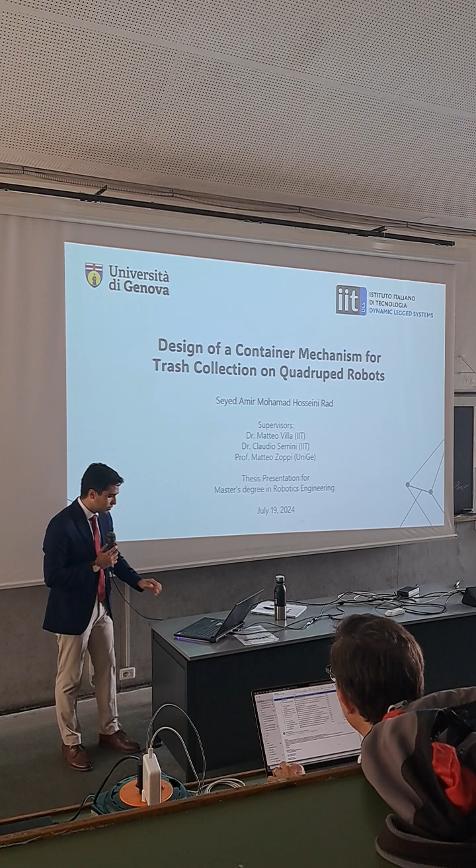Today I'm pleased to present my master's thesis on design of container mechanism for trash collection on quadruped robots. I will start with a short introduction to show the importance of the work. Then I will discuss the current robotic solutions and their limitations. I will discuss some background, and then I will start my project by defining the conceptual designs, down selection, simulations, mechanical design, manufacturing, and assembly. I will discuss the features, and at the end I will show the test and validation and conclusion.

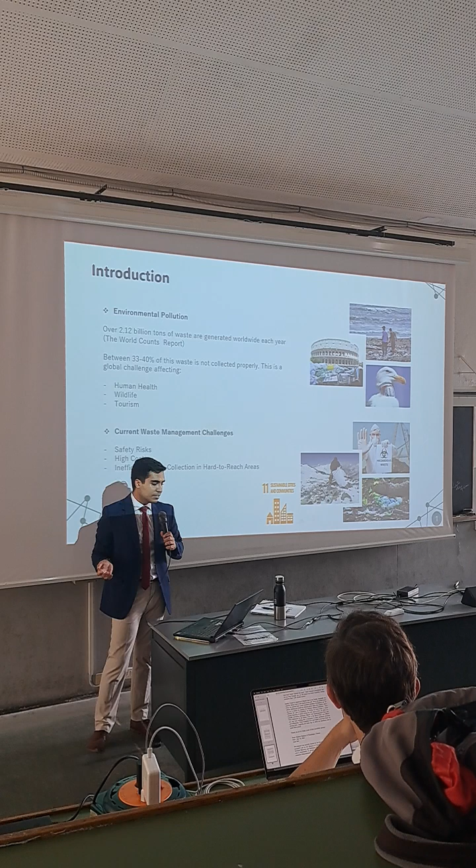An alarming amount of 2 billion tons of waste is produced every year by humans, and a huge amount of it is not collected well. This global challenge affects human health by spreading disease because of animals, and it also makes tourist places less attractive. Currently, this trash is collected manually, which brings safety risks for the laborers, it is very expensive, and the trash in hard-to-reach areas is not collected well.

Currently, there are some robotic systems to help us with this task. For instance, the first one uses a wheeled platform with a special mechanism mounted on it to collect the trash and store it. It's a very good idea to integrate the robotic arm with the mobile platform, as you can see in the second and third ones. In the second one, the arm is mounted in front and the container in the back of the mobile robot. A similar approach is deployed for the third one, developed by IIT in 2020.

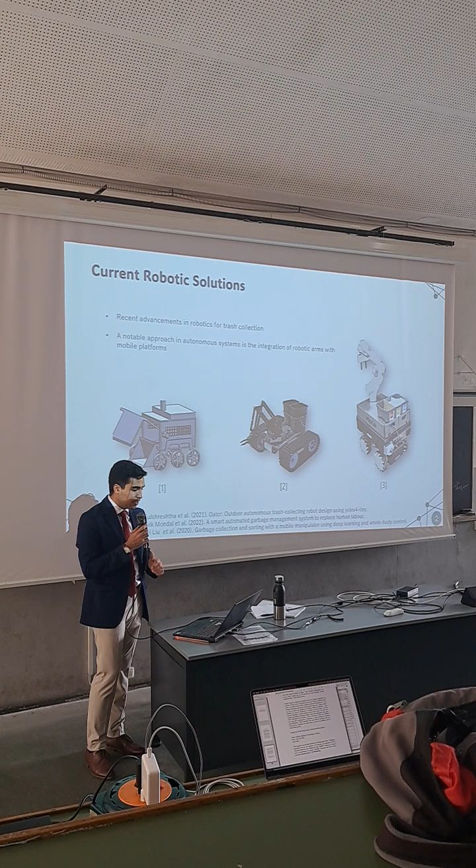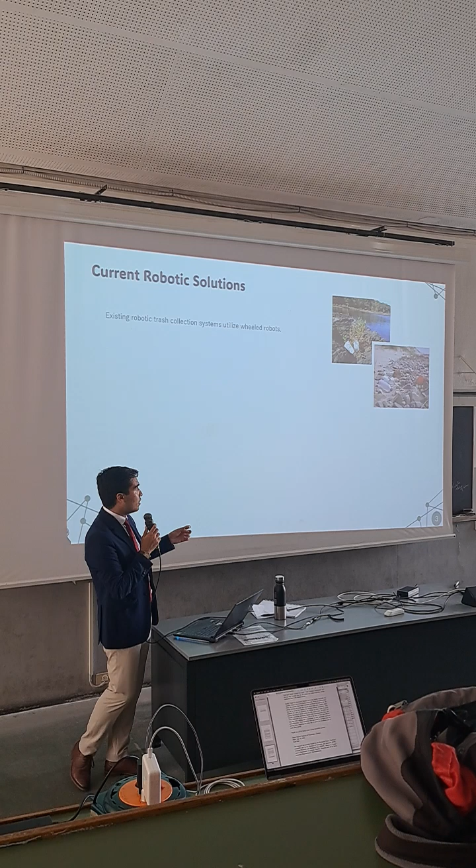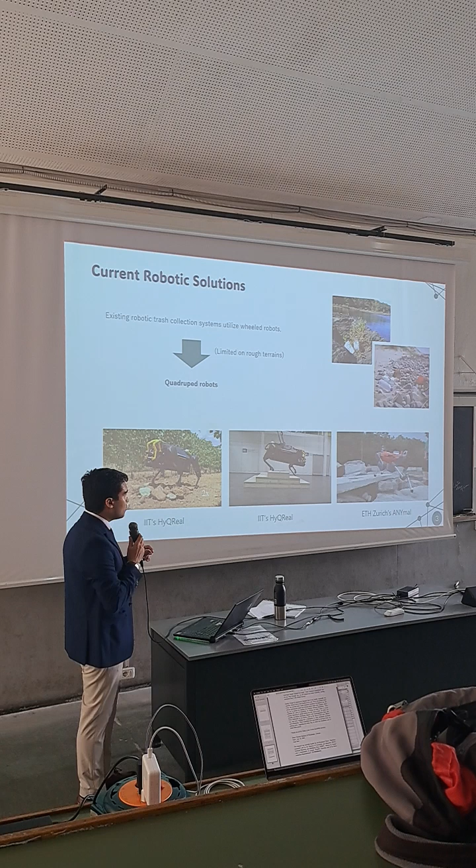But why are the current existing robots not sufficient? Why do we still need new robotic systems? The current solutions use wheeled robots that will get stuck in hard-to-reach areas or on rough terrains. That's why we are introducing a great solution, which is legged robots, with higher locomotion capability. For instance, in the first and second videos, this is the HyQReal robot developed by the Dynamic Legged Systems lab at IIT, and the third one, ETH's ANYmal, where it is clear how effective they can be for trash collection.

But imagine we have the legged robot. How can this robot collect the trash? We still need a robotic mechanism in order to do all the steps, from detection, collection, storage, and unloading, automatically without the help of humans. Here too, it is a good idea to integrate the robotic arm with the legged robot this time. And as you can see, there is a clear need for a robotic mechanism that can be mounted on the robot, the container, in order to perform all the steps automatically.

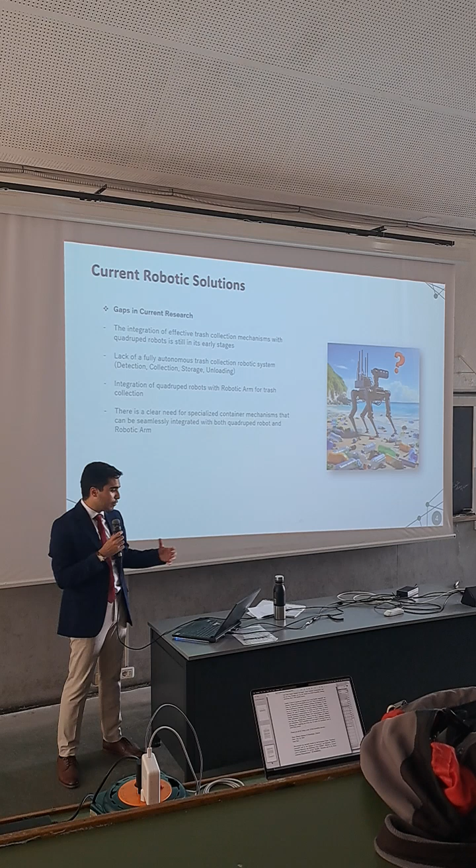Therefore, we define the background of the project by defining 3 main subsystems. The first one is the Unitree legged robot. The second one is the Unitree Z1 robotic arm. And the third one, which we discuss in this thesis, is the custom designed container mechanism. The cycle is planned so that the legged robot works in the environment and detects the trash with the mounted camera, then the arm grasps it and drops it in the container, and when the container is full, the robot navigates to the station to unload the...

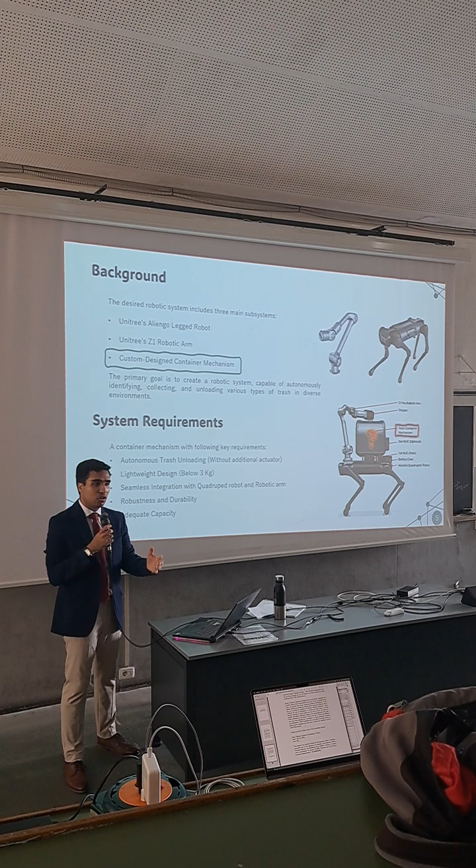Sorry. I think you are mute on Teams. Can you please check? Because Dr. Semini is telling me that... Can you stop the time? Sorry. It's okay. Now it's fine. It's fine now. Can you show me Teams? Okay. He says okay. It's fine. Okay, thanks. He's happy now. So it works.

We'll just move it, it's better, yes.

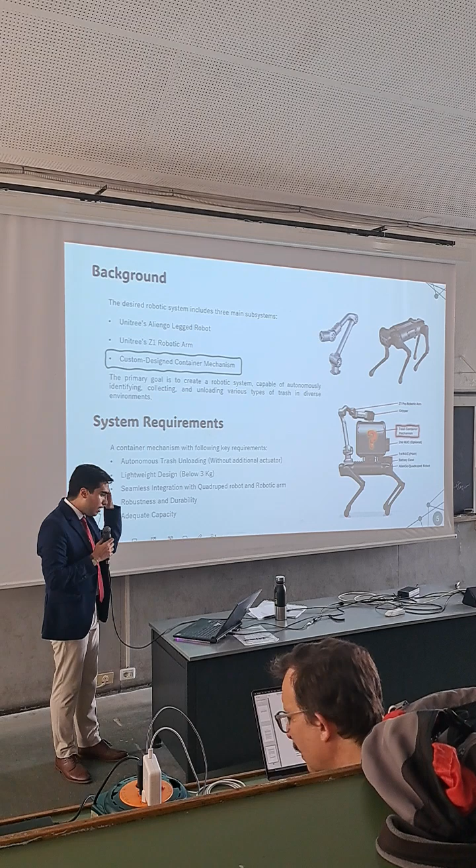Okay. So the container that we are going to develop requires some specifications. It should have the feature for autonomous trash unloading without any extra actuator. It should be lightweight to adapt with the Aliengo legged robot. It should be under 3 kg, considering the weight of the arm and everything. It should have a seamless integration with the quadruped robot and also the robotic arm. And it should have enough capacity for the trash.

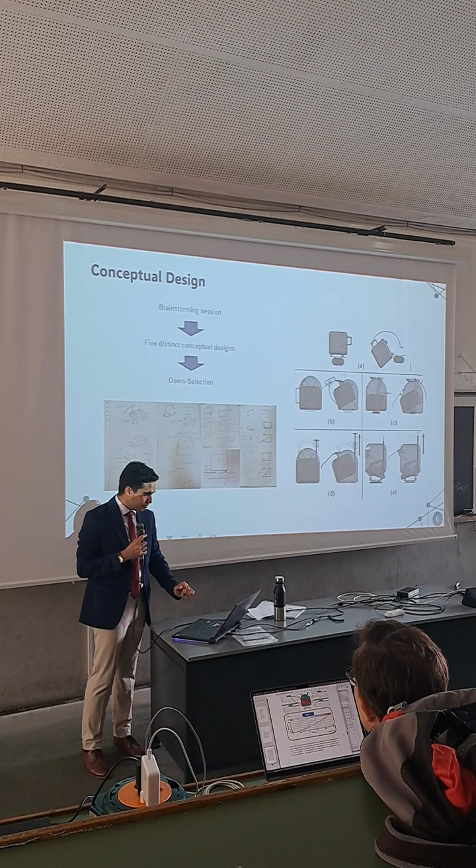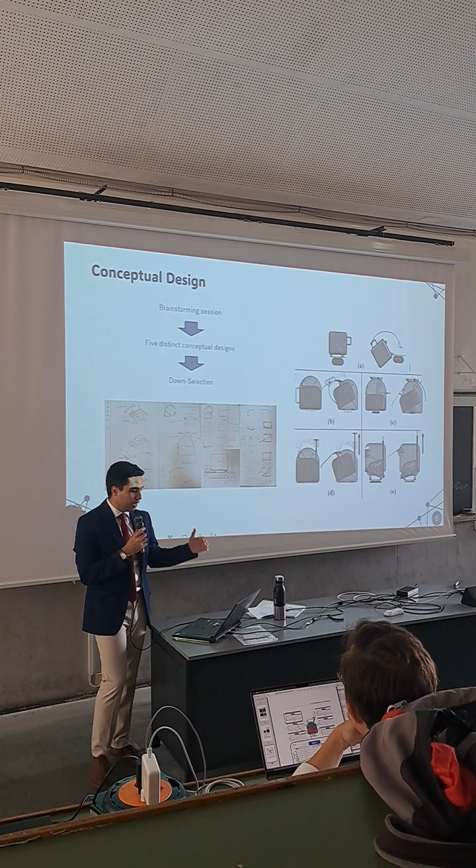Therefore, we started the project by brainstorming about the possible solutions. At first I designed my ideas on paper, and then this brainstorming led to 5 different conceptual designs, each with its own advantages and disadvantages. Then we continued the process of down selecting.

Starting with the first conceptual design, this is the simplest mechanism that comes to mind. But as you can see, with the hook, it is simple, but it has very high gripper motion, which is probably out of the robotic arm workspace. And also it is very unstable because it's attached on one side.

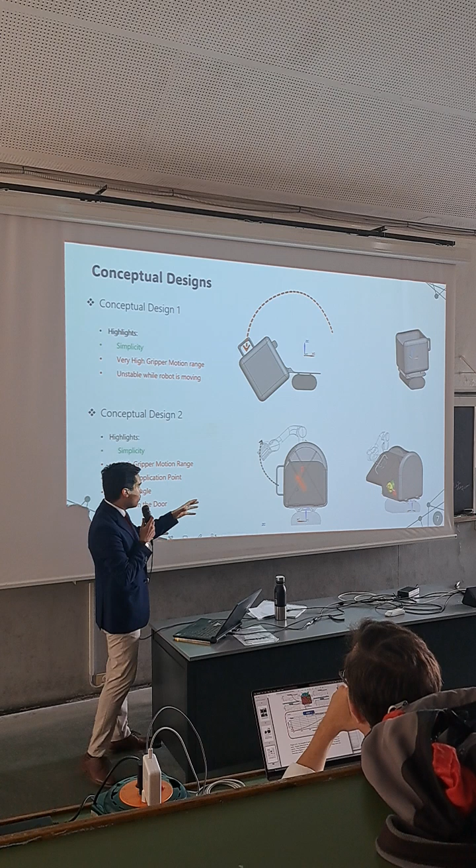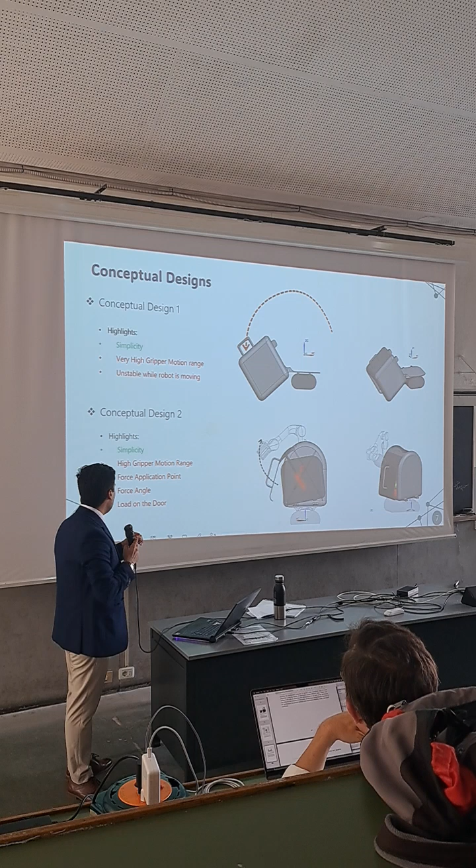Then we move to the second conceptual design that is still simple. You can see that it has 2 main bodies, an internal basket and an external body, and the handle is mounted on the door. It is simple, but it has a high gripper motion range, and also the force application is not optimized because it is applied in the center of the basket. Also the angle is not good because it's not vertical. And the force is transmitted through the door, which is a high load on the door.

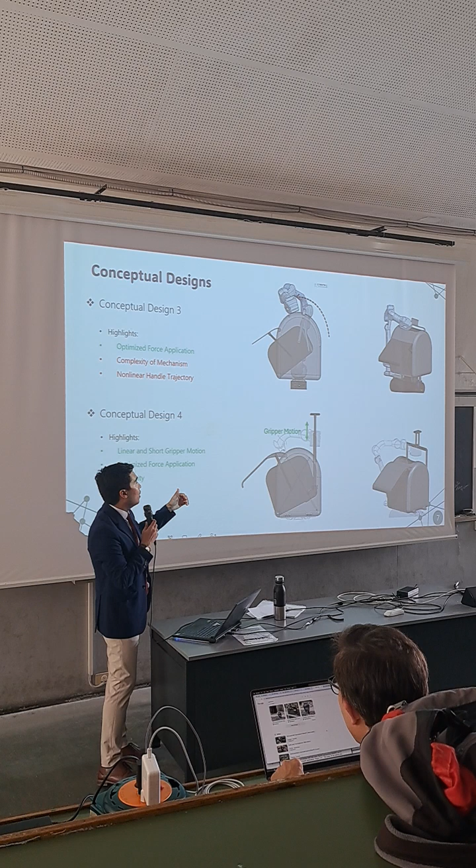So we move to the next conceptual design. This time the force is applied in the back of the basket, and the handle is mounted in the back. Now the force is optimized, but as you can see, the mechanism is relatively complex, and there is still a non-linear trajectory for the gripper in order to perform the unloading process.

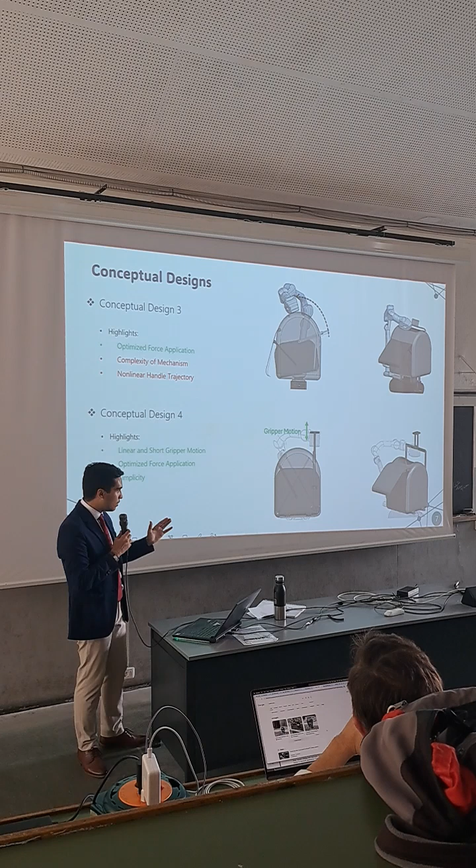Then conceptual design 4 has solved the problem of the gripper motion. This time there is a very short and linear gripper motion. The good thing is that this mechanism is relatively simple, and the force application is totally optimized because it is applied in the back of the basket. It is suitable for heavy load, and the force is applied vertically.

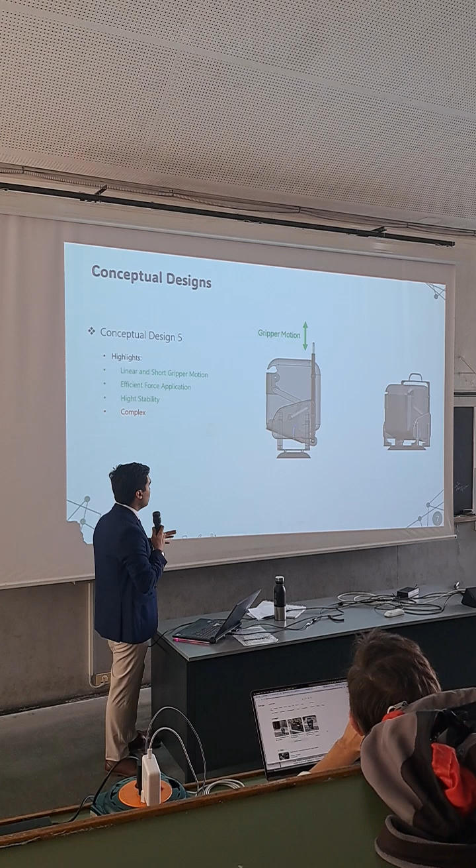Conceptual design 5 is a bit different. This time we don't have the external basket and internal basket. We still have the linear and short gripper motion, and the force efficiency is high. This is more stable because it has fewer components. But as you can see, this is relatively complex. So we need to choose one of these ideas to continue the process of mechanical design and development.

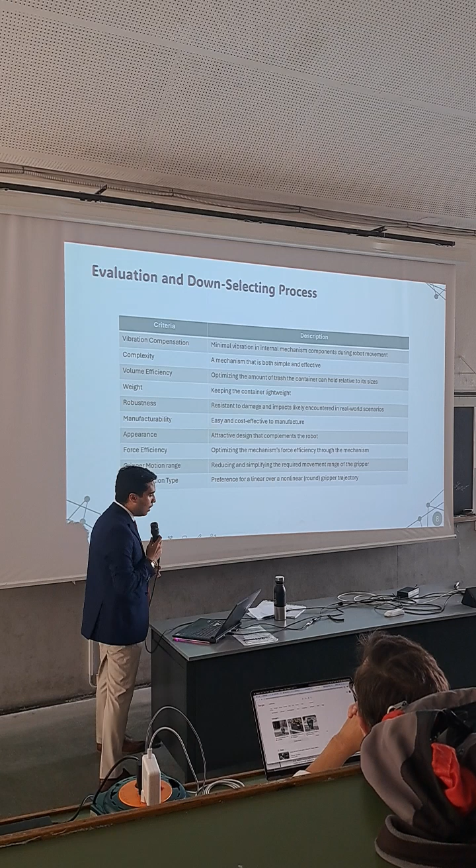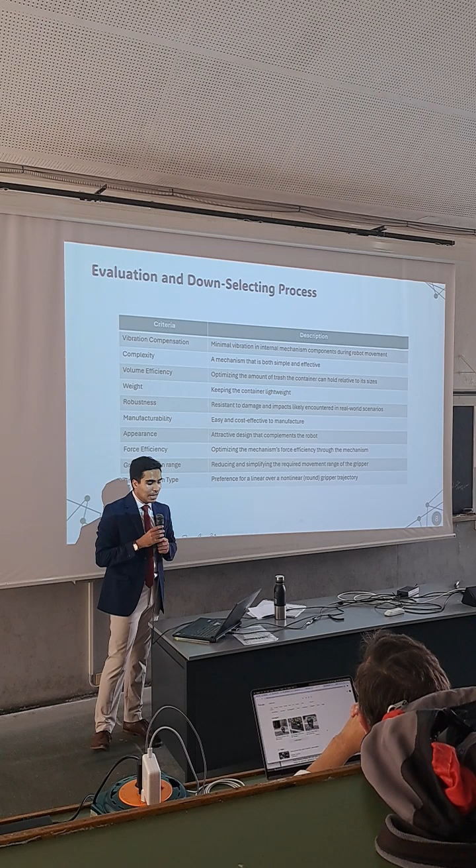So we defined several criteria to help us choose one of them, such as vibration compensation, it should have minimal vibrations; the complexity should be simple; it should have enough volume; it should be lightweight; it should be robust against external forces and damage. It should be easy to manufacture, the appearance should be nice, and force efficiency is important as I mentioned. The gripper motion range should be short, and for the gripper motion type, we prefer linear rather than round.

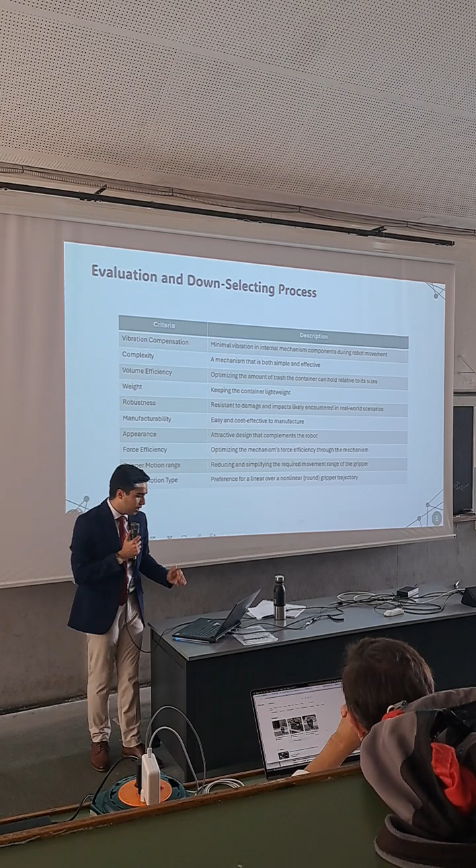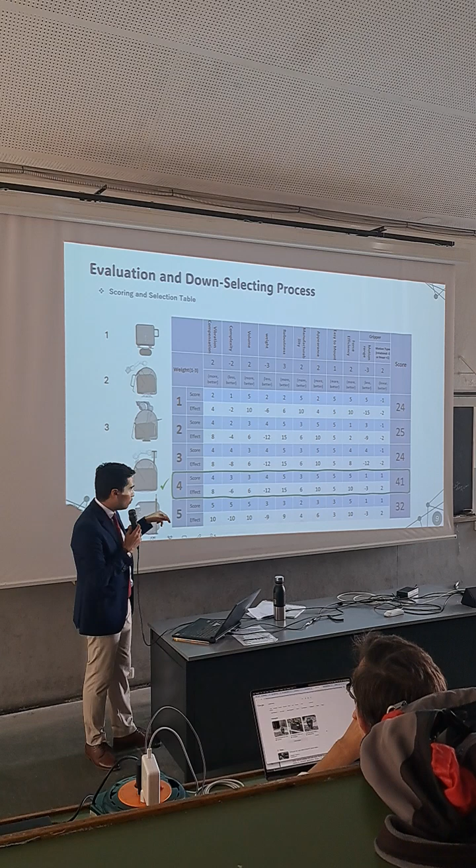Therefore, we designed this table with subjective scores for each criterion, and here you can see 5 designs. We assigned the weights and everything, and finally we can see that design number 4, with the highest score, is chosen to be developed for the next steps.

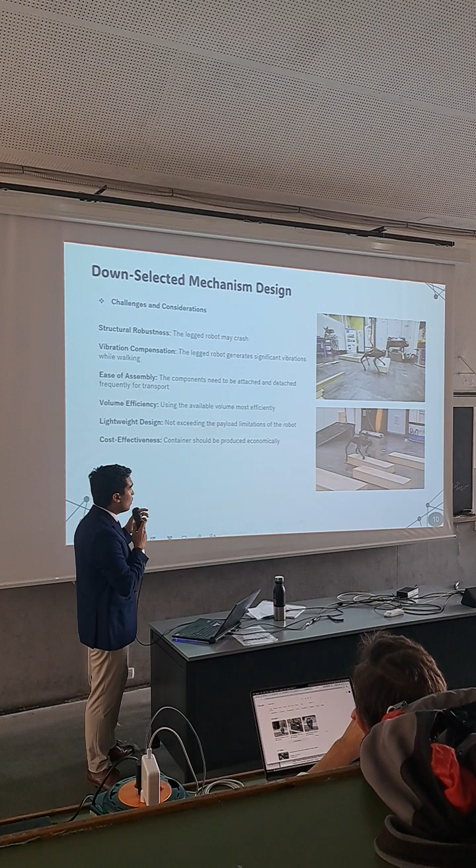So for the selected mechanism, we started the mechanical design, but there are some challenges and considerations that I want to mention. For instance, as you can see in the first video, the legged robot while moving may crash or fall over. That's why the design should be robust enough against impact forces. As you can see in the second video, the robot while moving generates a lot of vibrations. So the design should be robust against the vibrations.

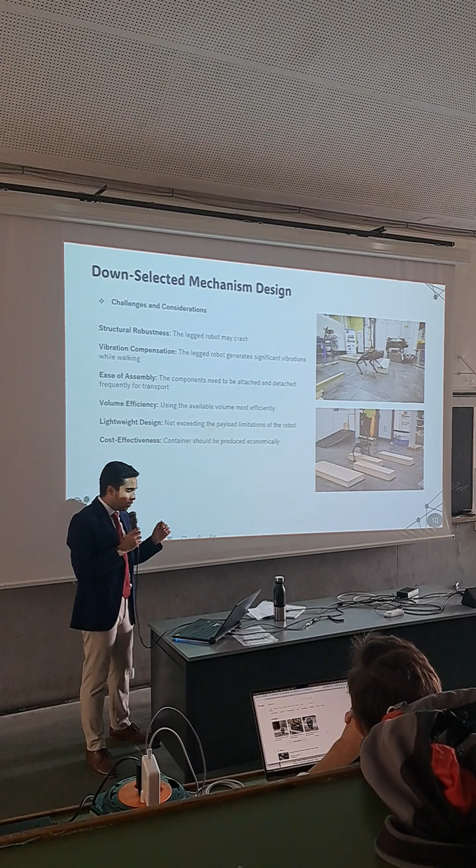It should be easy to assemble and disassemble because it's going to be attached and detached in the operational area. The volume should be optimized, it should be lightweight, and also it should be cheap to manufacture. Therefore, the design step started by defining different revisions.

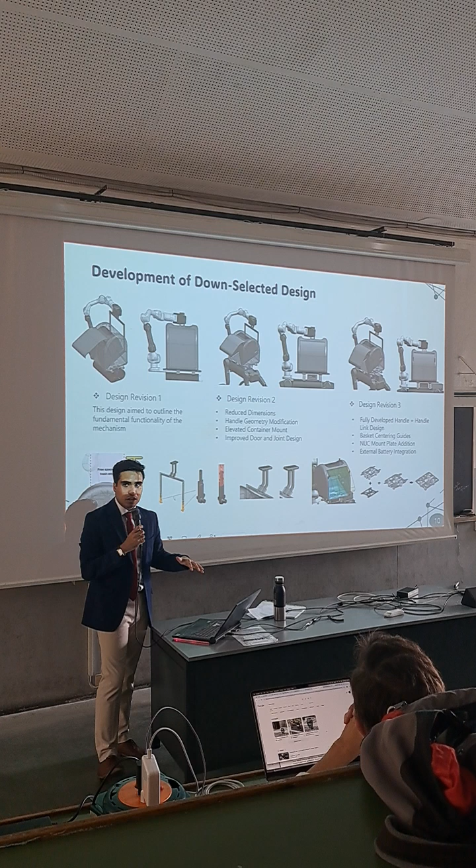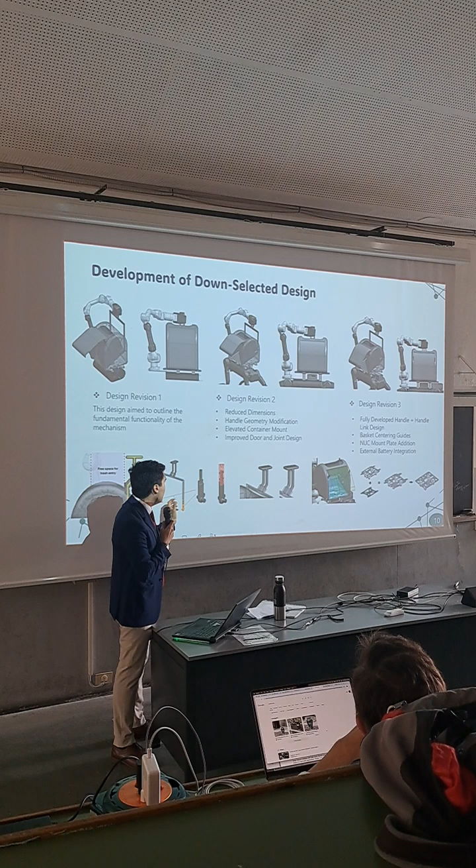From the beginning, for instance, the first one just shows the mechanism functionality, and then some features were added, the geometry of the handle has been changed, the handle link has been completed, several features have been added, like the centering guides for the basket while unloading is performing. And also from revision 4 to revision 6, you can see several modifications. This phase was the main phase of the project that took about 6 months.

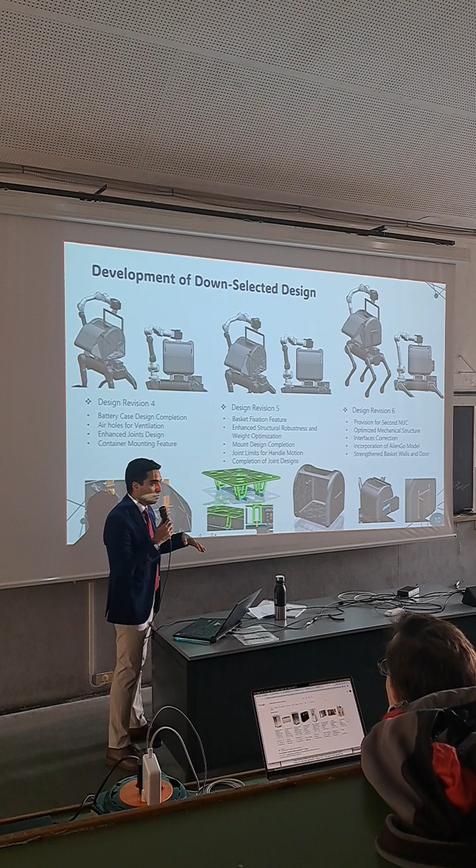For instance, here you can see that the joint limit has been designed in order to limit the range of the motion for the handle. The mount design has been completed. The ribs have been added to the external body to make it more robust. And also, other features have been added to the design.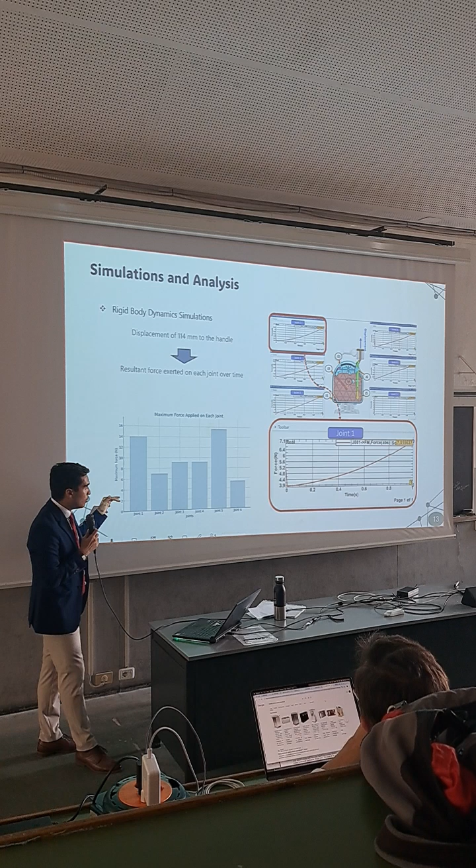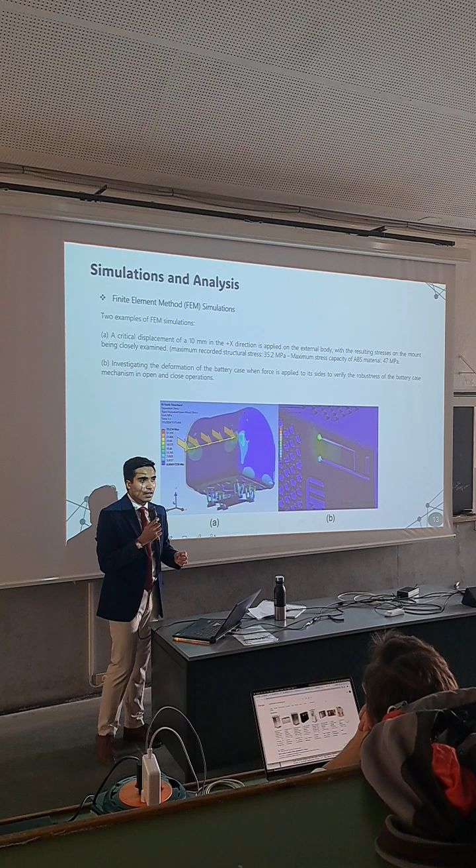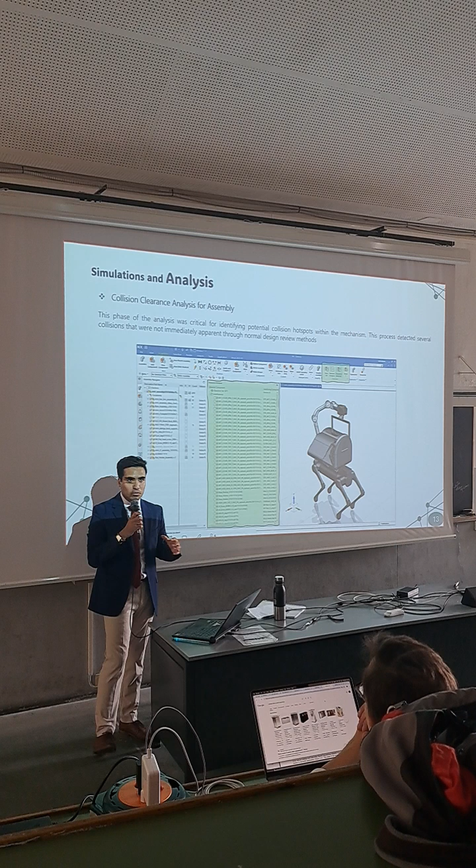Finite element simulations also have been done. For instance, in the first one, you can see that the stress applied on the mount by displacement in the component has been analyzed. For the second one, the operation of opening and closing of the battery case has been investigated by using these simulations. And also collision analysis has been done in order to make sure that there is no collision between the internal parts of the mechanism while the unloading process is performed.

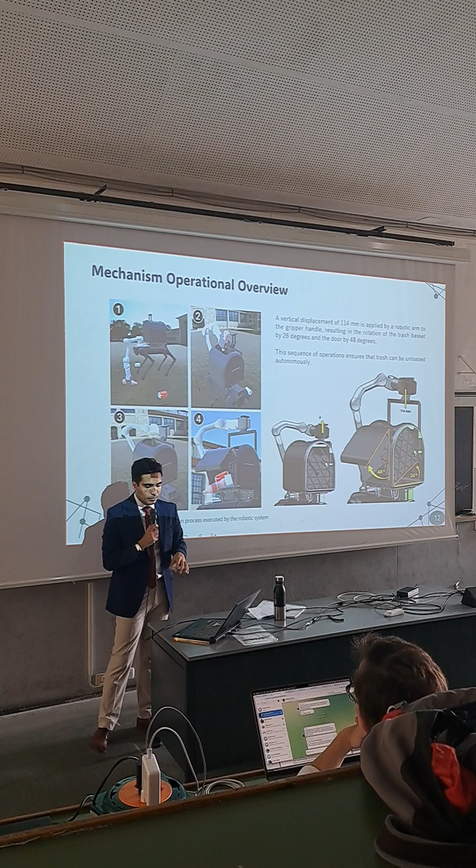As I mentioned, the operational overview is that the arm grasps the trash, drops it inside the container, and then grasps the handle and pulls it up by about 11 centimeters, and then the unloading process is done by rotating both the basket and the door at the same time.

Then this design has been manufactured with ABS material, and SLS manufacturing method has been selected for 3D printing. The parts have been printed in the mechanical workshop of IIT, and after the printing, additional finishing has been done on the parts in order to minimize the friction in the joints.

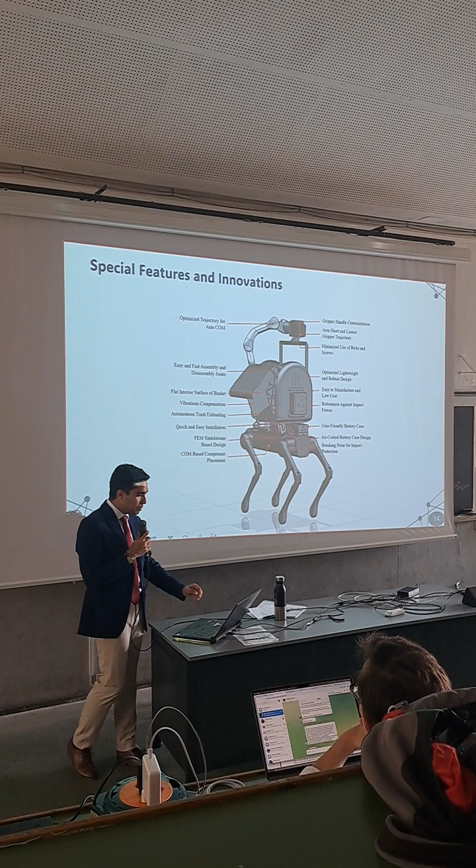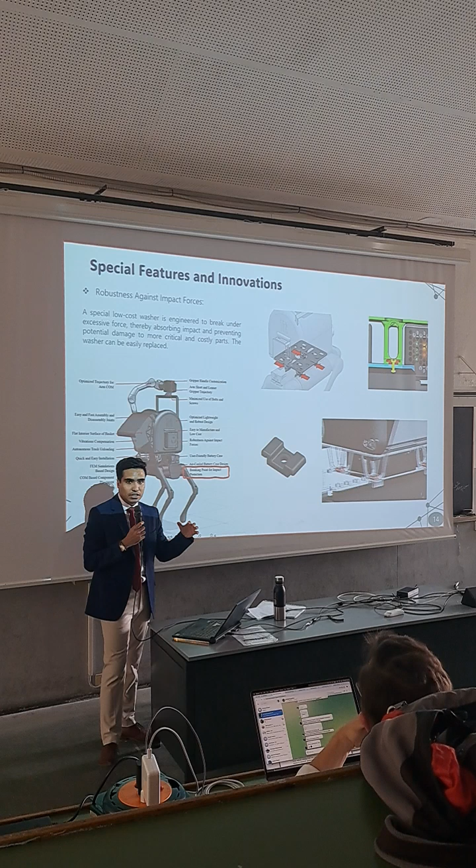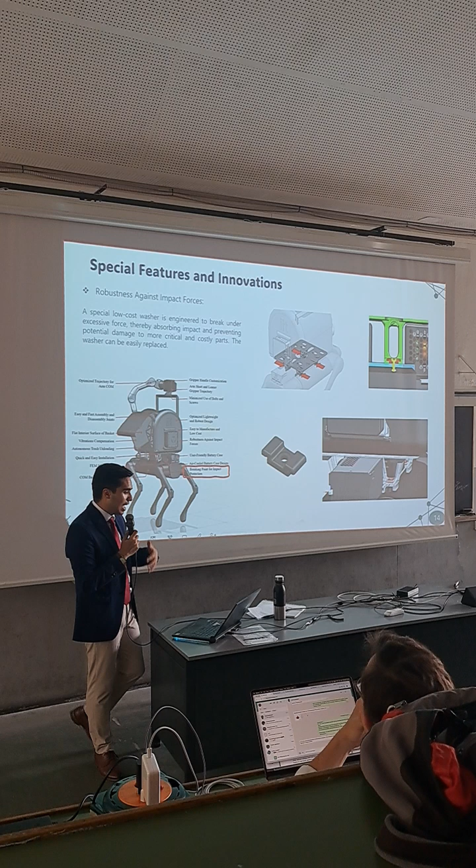Here I would like to mention some of the features of the mechanism. Firstly, as I said, this mechanism has the feature of autonomous trash unloading without the help of a human and without any extra actuator; it is done only by the robotic arm. As I mentioned, the robot may fall over. So I have designed some engineered washers that will break under a certain amount of force that is critical. So in terms of bad movement or impact forces, these washers will break before, in order to prevent damage to the more important and costly parts.

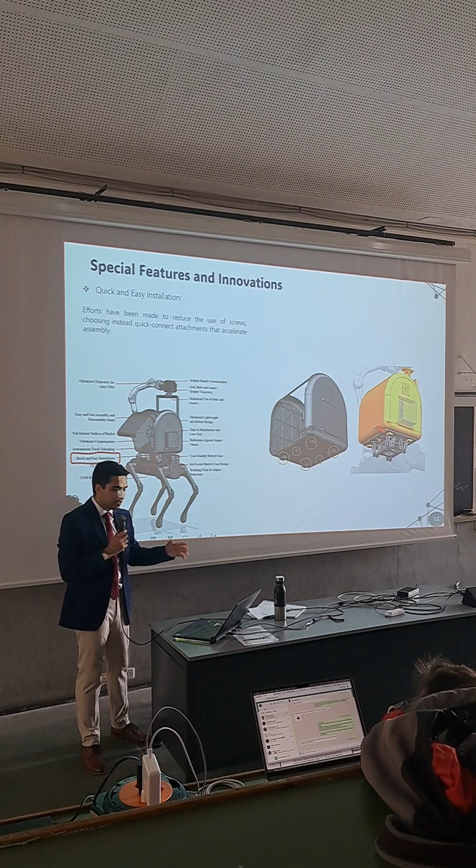For the installation and detaching of the container to the robot, this feature has been considered so that you can really fast attach and detach the container. For instance, you just need to put the container on the mount and insert the pins. It takes less than 20 seconds maybe.

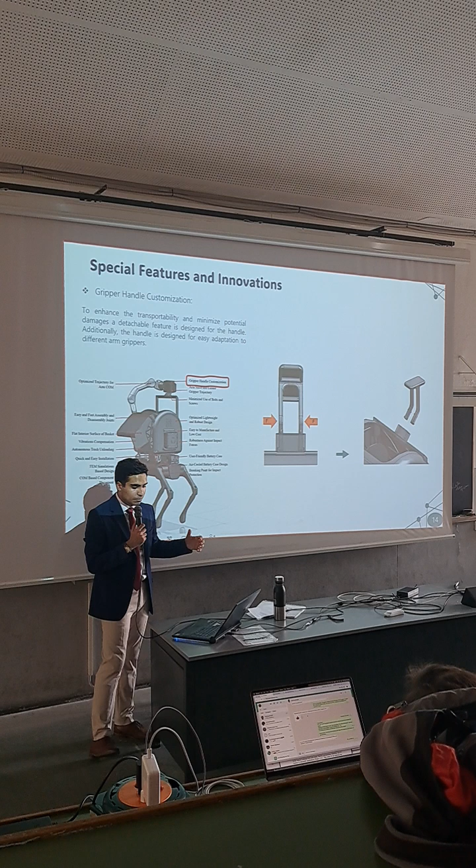In order to change or detach the gripper handle, you just need to push two sides of the gripper and remove it. This is very useful firstly for transportation and secondly because in different applications we are using different grippers, so it should be adaptable with different grippers.

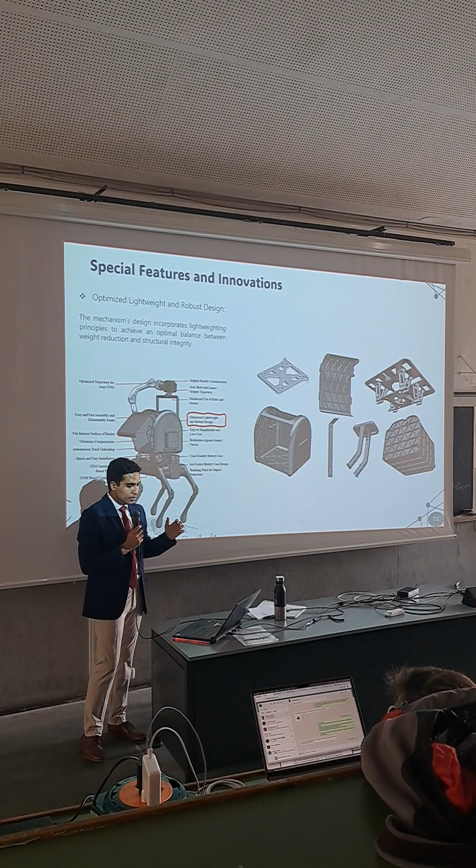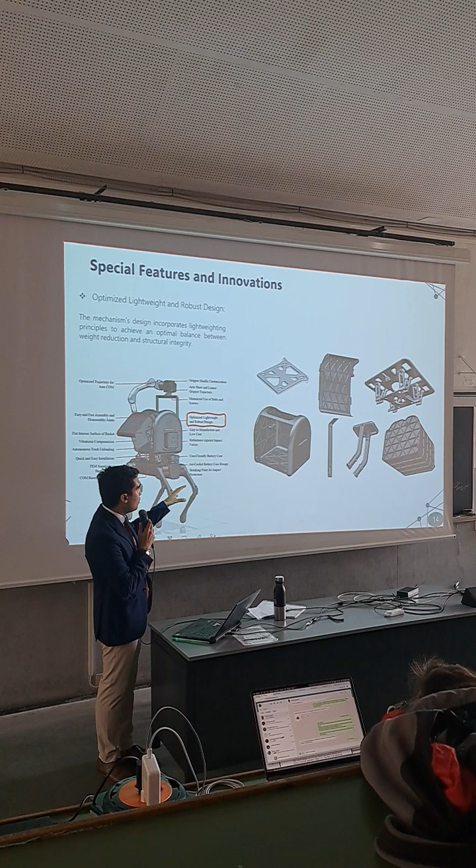In order to make the design robust against damage and forces, and also for preventing deformation after the 3D printing, I have designed this in a way that in terms of the geometry and the ribs, this design is both robust and lightweight.

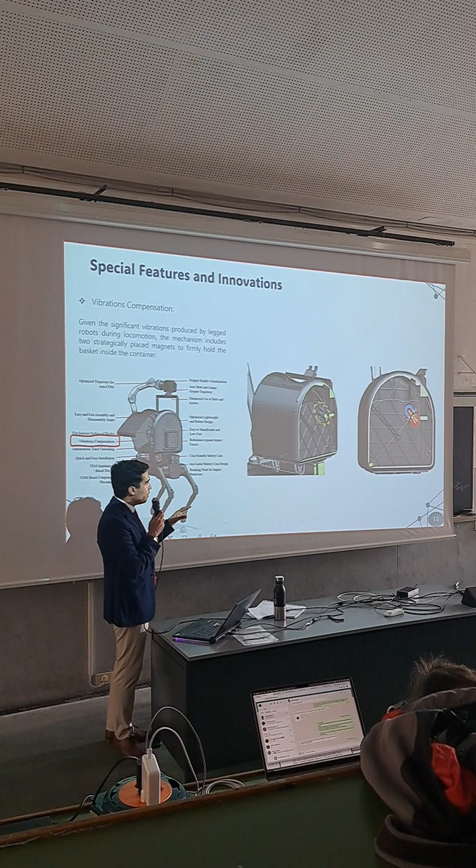In order to compensate the vibrations while the robot is moving, this feature has been added: there are two magnets considered in this part that attach the internal basket to the external body in order to compensate the vibrations generated by the legged robots.

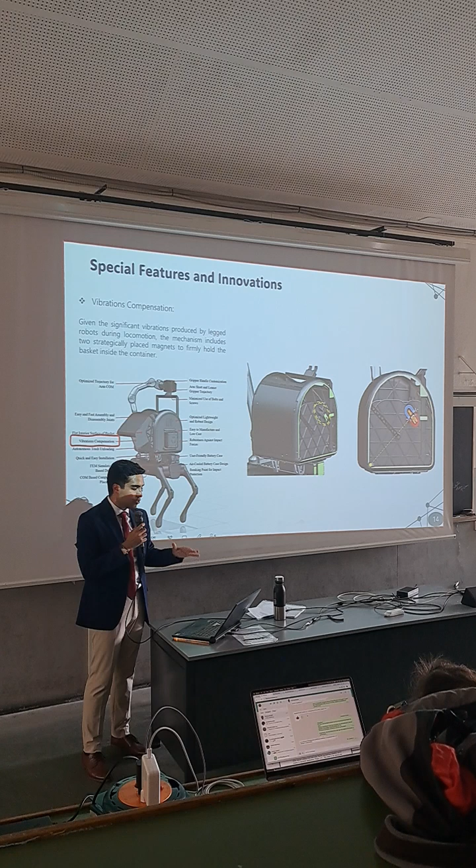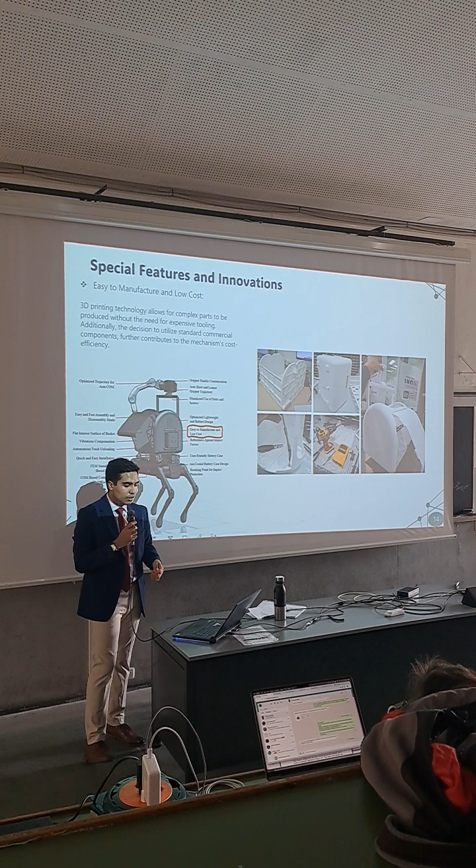This container is very easy to manufacture and is low cost because, first, for the geometries we are using 3D printing technology, and secondly, we are using commercial parts, especially for the joints, that are available from the local shops.

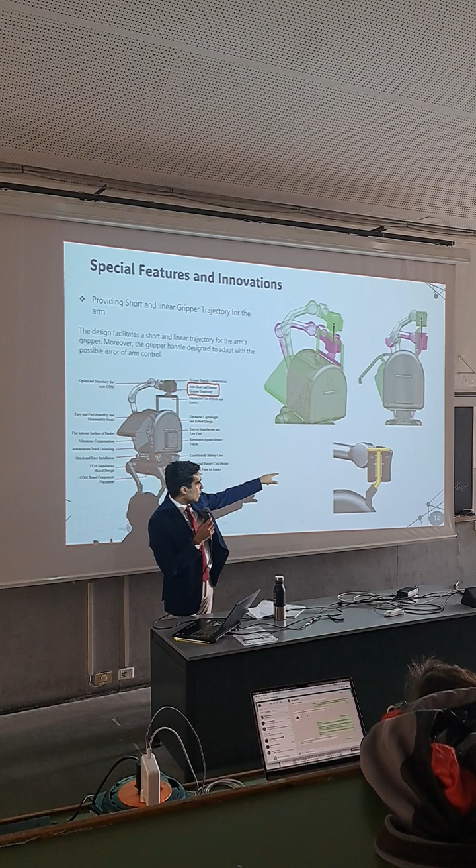As I mentioned, in order to perform the unloading process, we only require a very short and linear trajectory, which makes it very easy for the robotic arm to control it. And also, small errors are accepted because of this geometry. If the robotic arm has a smaller motion, it still can perform the unloading process.

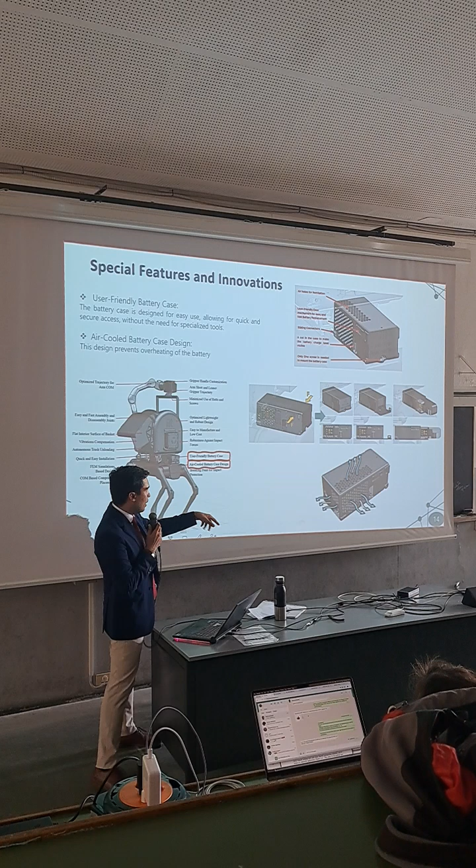The battery case has been designed in a very user-friendly way. This battery is required for the NUC. We can just remove it without any extra tool, just pushing the two sides, and replace the battery. And also, airflow spots have been considered for preventing the overheating of the battery.

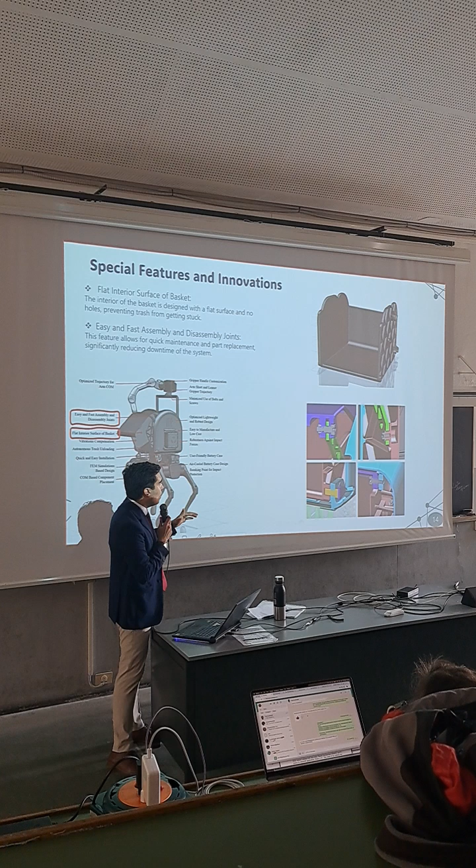The interior surface of the basket is totally flat. As you can see, there are 3 joints on each side, but all of the joints are designed in an external way, so there is no hole inside the basket to prevent the trash from getting stuck. And also all the joints are designed to be assembled and disassembled in a very easy and fast way, which is very useful for future maintenance.

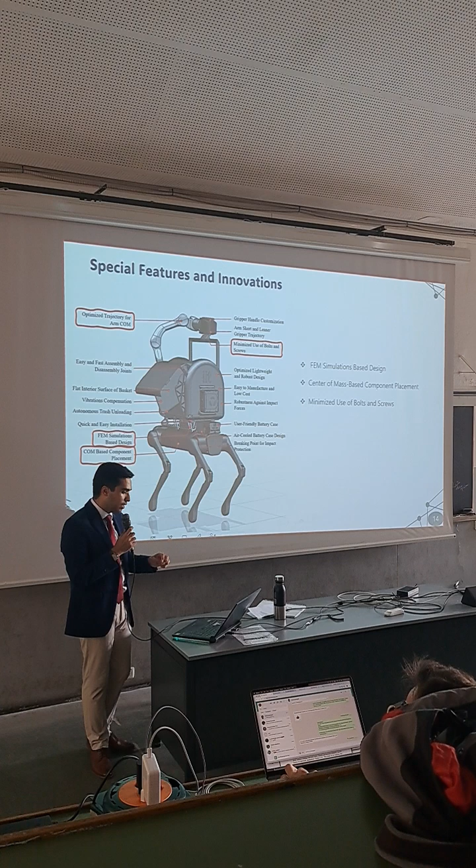And also other features like finite element simulation-based design, the center of mass of the components trying to be the same as the center of mass of the robot, and not only in the parts that I mentioned, but in the whole design I tried to use the minimal amount of bolts and screws.

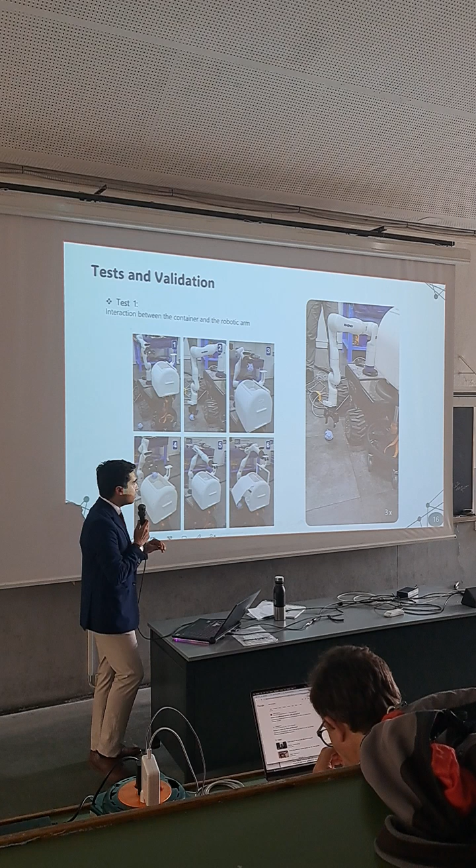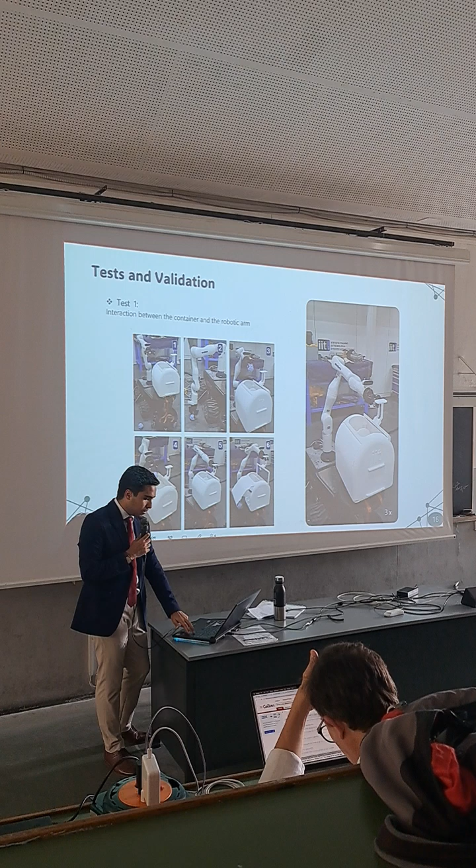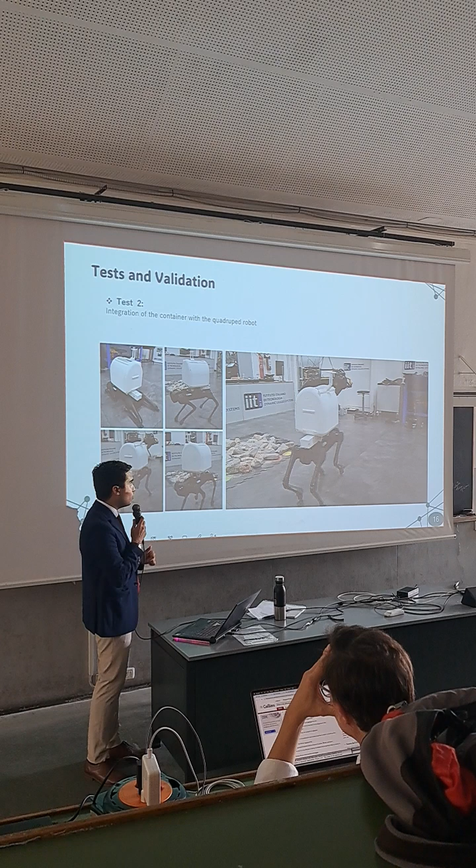And then it is dropped inside the container, and now the robotic arm grabs the handle and pulls it up to perform the unloading process. We also did another test mounting the container on the legged robot to see if unusual vibrations are generated, but the results were positive and no unusual vibrations were detected due to the features added.

Finally, I would like to present the paper that is published and accepted for the MESA conference that is going to be held in September.

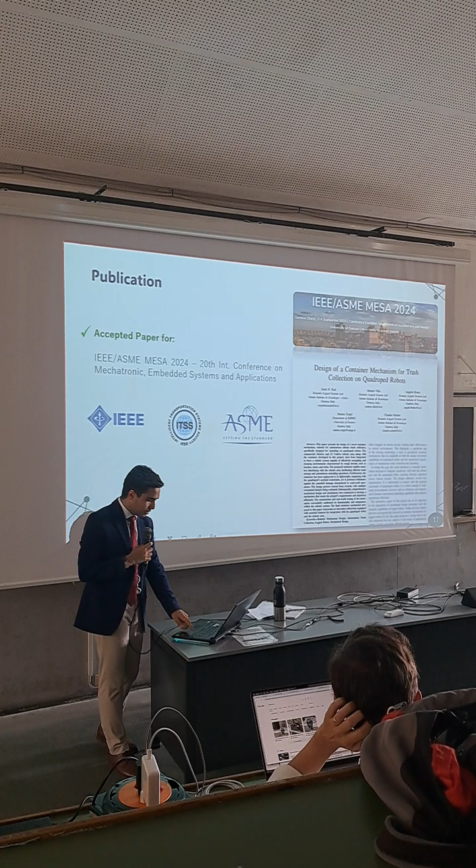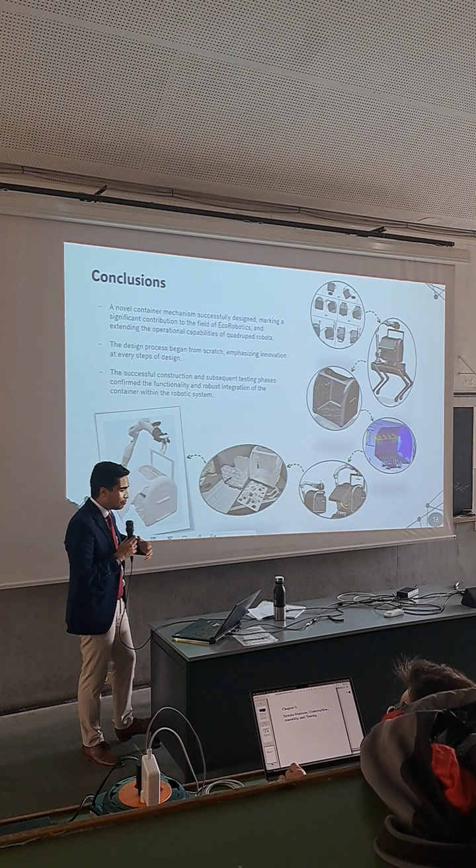And as a conclusion, in this project we designed a mechanism that can have a very significant contribution to EcoRobotics, and it can also extend the capabilities of legged robots. As you saw, the design started from scratch and now finished with the physical container mechanism. And we also did all the tests in order to prove that this mechanism can work in the real world.